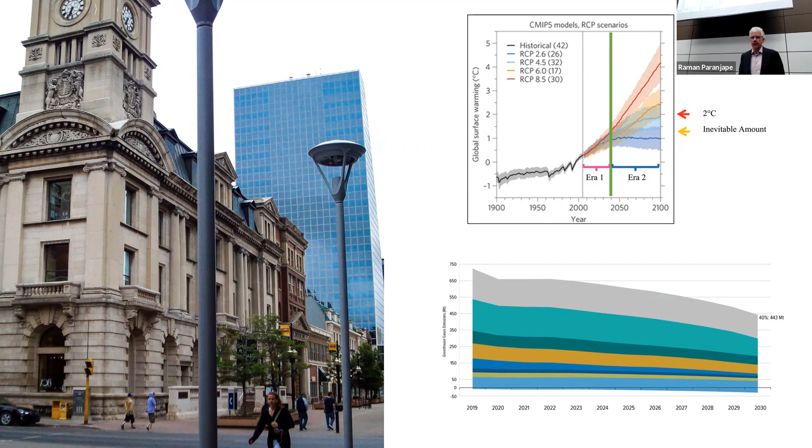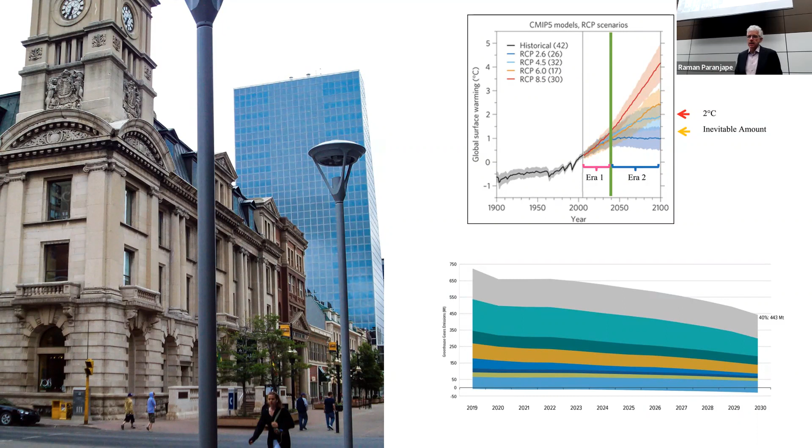The IPCC, the panel on climate change, has said that we need aggressive and sustained regulation and reduction in greenhouse gases in order to limit climate change. I don't think I need to belabor that. We're just going to take that as a given, and that people in this room are not going to push back against that. The government of Canada has committed to reducing Canada's greenhouse gas emissions by 40 to 45% below 2005 levels by 2030, and to reach net zero by 2050. So that's a federal commitment.

And the provinces have collectively all signed on to meeting a 30% reduction by 2030. Now, every time people talk about emissions reductions as a percentage, there seem to be different dates and data points, so it's very confusing. I think the takeaway is we need to make a big reduction, and we need to make it soon. End of story.

So what do we have as current measures in place? Well, first and foremost, we have building codes. And we have our senior code officials for the province in the room right now. Our building industry is governed in all municipalities in the province by the National Building Code and the National Energy Code. And there are others - National Plumbing Code, Fire Code, etc. But the two pertinent ones are the Building Code and the Energy Code.

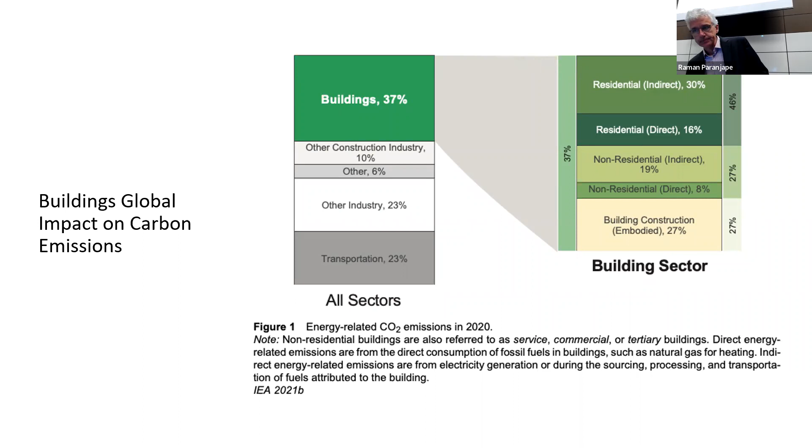Now we come down to Saskatchewan. Saskatchewan is even more sparsely populated, and we are more resource intensive. So the buildings sector only represents about 5 to 7% of greenhouse gas emissions. It varies by which data source you get and who includes what. But it's seemingly saying that buildings aren't much of a problem in the problem. We're still part of the problem though - that 5% represents about 5 million tons a year, so we shouldn't be ignoring it.

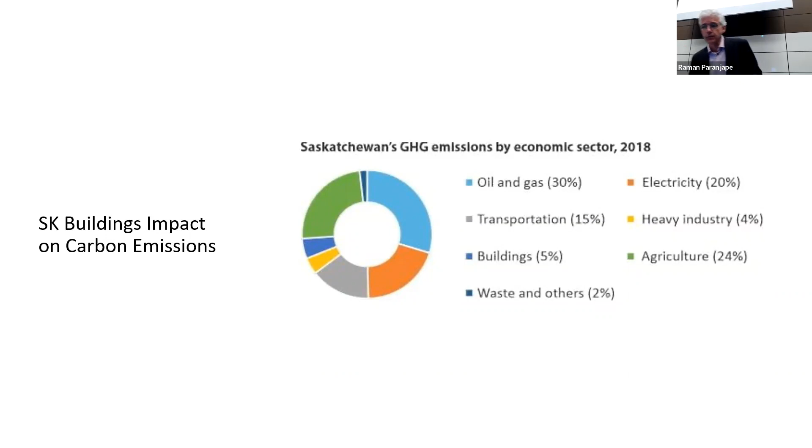Now I'm going to take a break from that background information on buildings, and we're going to turn this over to Nanette Solomon from SaskPower, because I think it's very important for all of us to get an understanding of where SaskPower is in the story, because it's impactful for where we might go in the future. And it's going to impact all of the symposium, not just buildings. So Nanette, I'll give it away.

Yep, sure. Like you say, in Regina, all the buildings contribute about 60% of emissions, and at the world scale it's about 37%, but in Saskatchewan it's about 5%. Can you reconcile these numbers? Yeah, so if you take the geographic boundaries of Regina, we have no mines in the city, we have no forests, we have no farms in the city - basically no buildings outside. So a lot of the emissions can be attributed to, I think if you spoke to the city, things like wastewater and water treatment and landfill, and then buildings.

There are some industries, and whether or not they include on-site emissions or off-site emissions - the data for stuff like that is very confusing. Evraz is a huge power user, but it's not in the city, so where do those emissions go? The emissions are really mostly at a generating station. So yeah, it's very confusing.

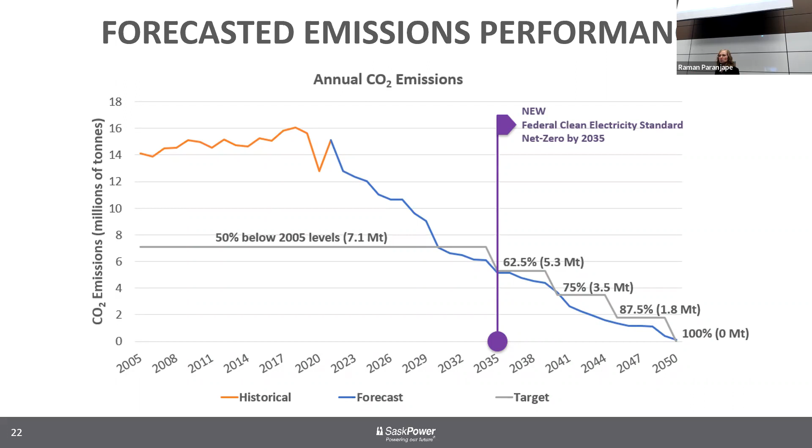The technical challenge is that the technologies we need to transition from where we are now to technologies that basically don't produce greenhouse gas emissions, they're just not ready yet. There are some developing, some small scale ones we're taking advantage of, but the large base capacity is still developing. The time to get there is only 12 years, so the amount of infrastructure we have to change over and build in that time is quite large. That's challenging, and of course that will come with a cost.

We have already been working extensively to decarbonize our electricity system. We're on track to meet our goal to reduce greenhouse gas emissions by 50% below 2005 levels by 2030. We're also on track to increase our renewable capacity up to 50% by 2030. And we are working to retire our conventional coal units—we're mandated by the federal government to retire all of them by the end of 2029, and we're on our path to do that. We're also looking at our system as a whole. That huge distribution and transmission grid has to go through a lot of change to make way for grid modernization so we can facilitate all these new technologies coming on.

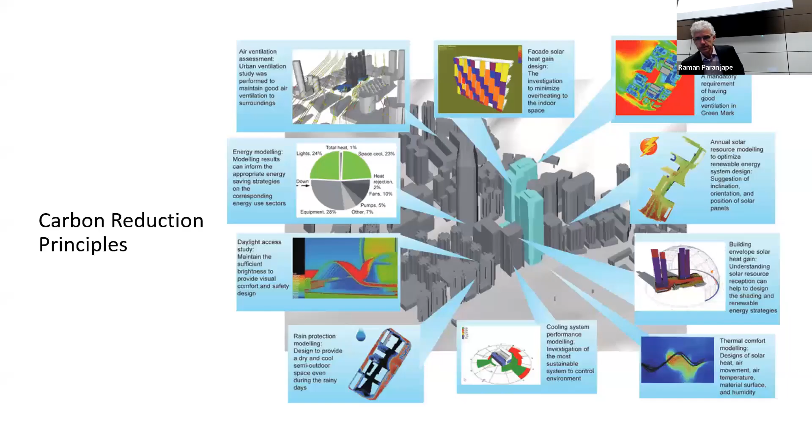The second one is life cycle assessments. I mentioned before that a good portion of the energy in buildings is identified as embodied carbon. That's really the carbon required to make the products, extract the materials, build the buildings, and then get rid of the building at end of life cycle. And it's not insignificant - your choice on materials can heavily influence what the embodied carbon is.

That's something that's been a rapidly evolving part of our business over the last 10 or 15 years. It's only in the last few years that we've had good tools and good benchmarks for embodied carbon in products. It's not universally adopted, but I think we're going to see a more aggressive move in the marketplace to requiring embodied carbon to be put on like a nameplate or product listing for comparison, and then actually incorporated into the design.

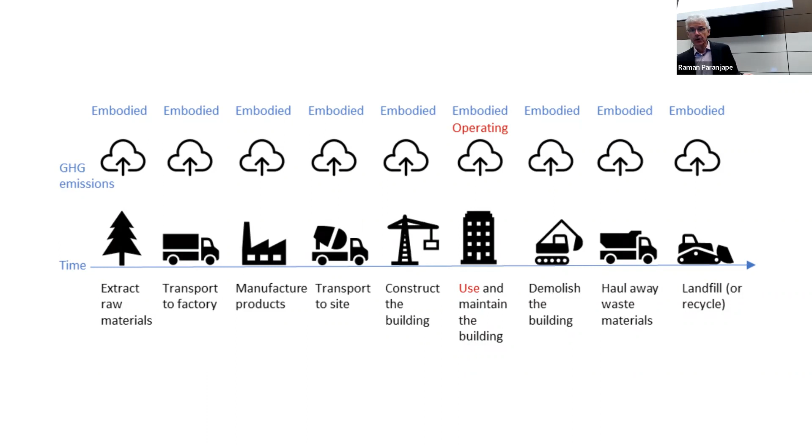The next principle we have to keep in mind is how energy is used in the building, and that's operational carbon.

The basic principle of all carbon reduction in the building sector is, number one, you have to decrease energy use. Nanette mentioned demand side programs - that's the same as increased energy efficiency. Reducing the amount of energy you consume means the kilowatt of power you don't consume gives you 100% carbon reduction on that kilowatt. So if you reduce your energy use in your building by 50%, you automatically, without doing anything else, reduce your carbon by 50%. That's why demand side management for energy efficiency is so important.

The second part is, as we potentially move to electrification, if we just move to electrification without increasing energy efficiency or decreasing demand, we're going to have too high an impact on the electrical grid. So this is one of those things where you're benefiting by doing something at the use level - the house, the small building, or whatever - you're positively impacting another sector, because every kilowatt you don't use, SaskPower doesn't have to build, distribute, and transmit.

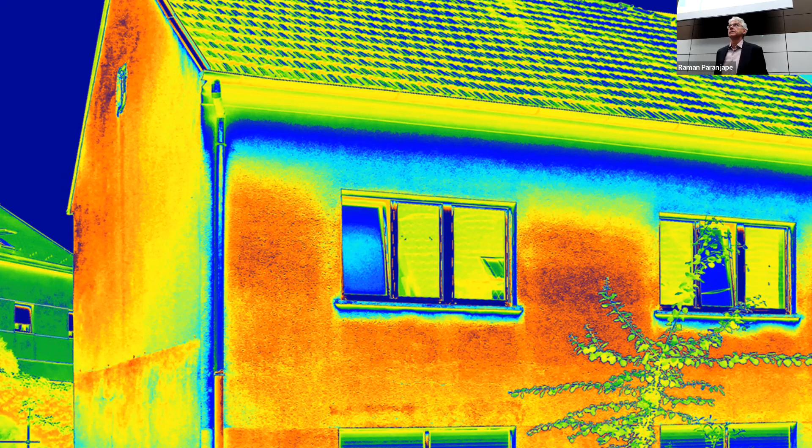And of course, one that's always forgotten about is building maintenance. So if you don't keep things up, particularly the mechanical and electrical things, you're going to use more energy.

So I thought I'd give a little example. This used to be my house, and I had plans for it, so it was easy for me to look at. It was built in 1951, and when Joanne and I moved into the house, nothing had been done to that house, zero, in the 30 or 35 years that it had been there.

Subsequently, we did a lot of upgrades, but taking that example, because there are other houses in the area that to this day have had nothing done to them, I thought, what if we applied today's codes or the measures included in the NRCan Greener Homes Grant? What would that do? So I did some hand math, and it's pretty good. We cut the use by, I think my hand math was 55%.

So that got me thinking about things. And as we were going through our little journey with our ASHRAE colleagues, we decided that, since the housing market needs some inputs as to what is beneficial, and none of the commercial engineers really have any impact on the residential market, we thought, why don't we as a group just look at a couple of sample homes and do some modeling? So we brought it to our ASHRAE community roundtable, and we came up with this plan.

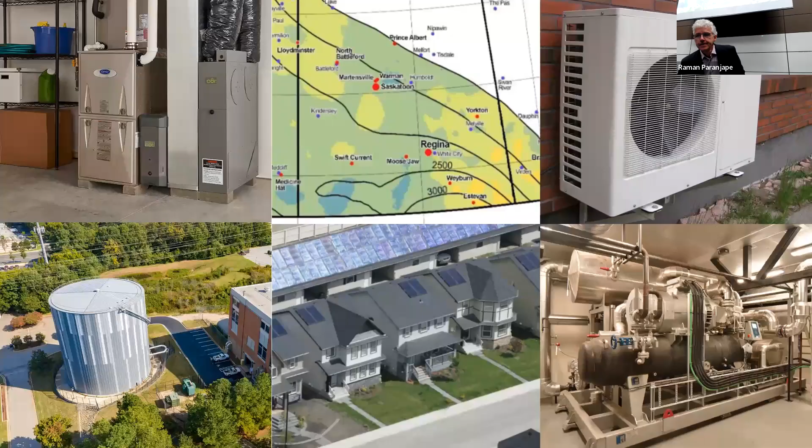So the next principle you need to look at is adopting clean heating. Clean heating can mean quite a few things. First off, it can just mean increasing the efficiency of the natural gas burning device. Take your old furnace that's 80% efficient and put in a condensing furnace or condensing boiler that's 95% efficient. So you get the efficiency improvement right away.

You can adopt heat pumps, and there are many different types of heat pumps and heat pump systems. In the symposium in a couple of weeks, I am going to give a little primer on heat pumps, because it is very confusing for the public. There are so many options out there that it's very difficult to get the message clear to the public about what the right approach is. There are also utility implications for heat pumps, so that will clear the air a little bit on that.

There's a consideration for solar thermal in Saskatchewan. I don't think solar thermal gets enough traction here, but we looked at solar thermal for a project 7 or 8 years ago, and it actually had a better payback than photovoltaic. It's very simple technology. Just think of a black panel with tubes in it and glass, and you stick methanol or glycol or something through it. It's simple, and it's been around for decades.

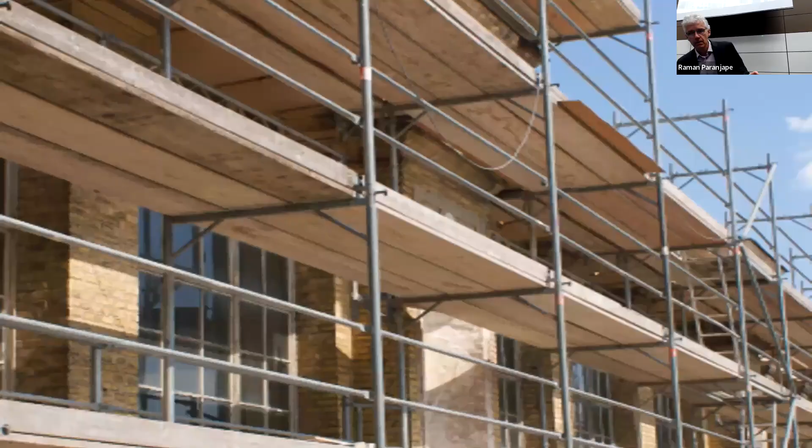And we do need to move that new home market towards net zero quickly, just as the message in COP26 had pointed out. That is a part of the puzzle. However, we only build about 1 to 2% of the building area every year. So that in itself is not going to solve the problem.

And we need to keep in mind that a lot of these changes, if there's a major life cycle event, like a change of use of the building, that is the appropriate time to implement a lot of these measures because you can do it more cost effectively.

Again, keeping in mind best practices in maintenance and operation, there's lots of publications about what that can mean in terms of energy savings. The accepted norm is somewhere between 10 and 15% energy savings if you keep your building maintained properly and the controls are operated optimally. Keep your thermostat set points where they should be. ASHRAE right now has a little program where they're trying to promote simply reducing your thermostat set point by 1 degree in the winter and raising it by 1 degree in the summer. It makes a difference. You're just going to heat less and cool less.

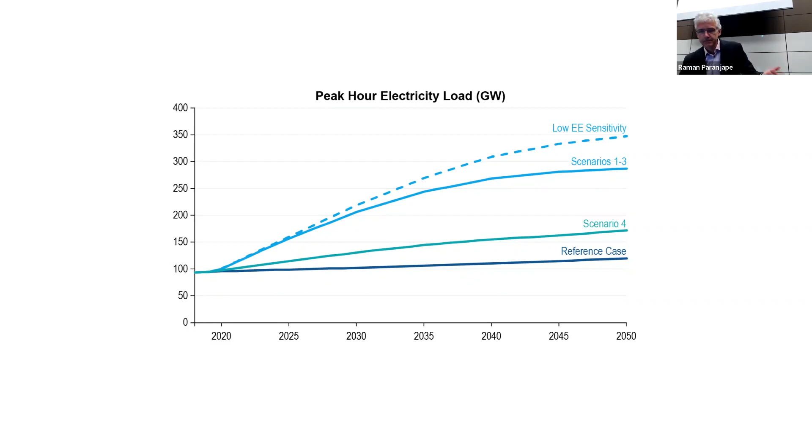We will need supplemental heat. I can't see them developing a heat pump for minus 40 — there are thermodynamic reasons for it, and you'd be trying to make the problem way too hard. So this hybrid approach is likely the one that will have to be taken, and it makes a huge difference on the power network. It's a good study, you should look it up. If you Google '2019 Canadian Gas Association energy study,' you'd be able to find it. If not, I'll give Raman the link and we can share it somehow.

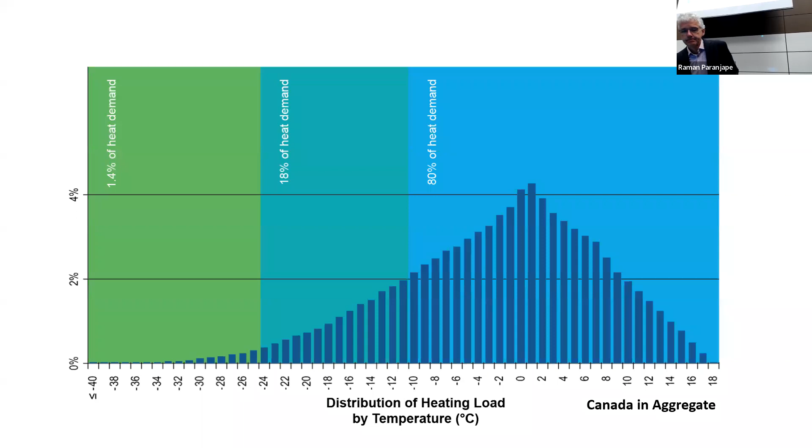And we need to form partnerships — looking at funding sources, incentives, how we fund incentives, and technical associations that will work together, across groups like the Home Builders Association or the Saskatchewan Construction Association. It can also be about finding partnerships for resources — we have a great resource in waste heat from the refinery. The refinery rejects a huge amount of heat. There are lots of technical issues with how you could capture that heat, but it seems like something that could be studied if we got the right circumstances, where you have a waste heat emitter and a user in the right geographic proximity to one another. We should think of that as a resource to capture.

So what are the other partnerships that we need to form?

Which brings us to our symposium. So this is our lineup, which will be in a couple of weeks. First and foremost, we're going to have Greg Kuntz from the City of Regina speak. Greg's the director for sustainability at the city, and he'll be giving the city's perspective, and some of the opportunities and challenges that come for the city, and the big questions that they need addressed.